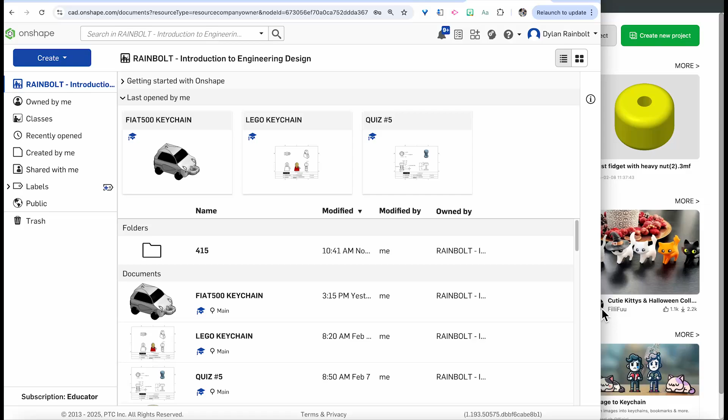I'm going to be showing you how to queue up 3D prints in Bambu Slicer software, and then how to actually 3D print it out.

What you want to do first in OnShape is go to the actual part that you want to end up 3D printing out. As you can see here, I've got my Fiat 500, and I've got these 4 tires as well. If you want to print out all of these parts together, click on this, hold down Shift, and then click on your last part.

Basically, what we want to do is create a composite part, as it's called. That's what I've got here. So how do we create the composite part?

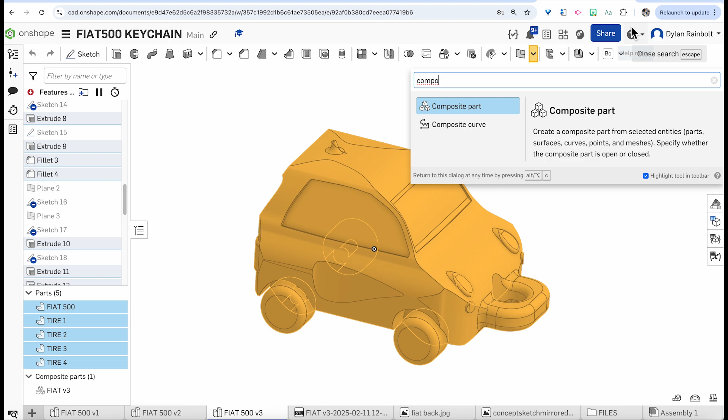After selecting all of these parts, go into Search Tools and type in composite part. As you can see, it's this guy right here. If I click on that, it's going to combine all of these parts together, so that's this part right here. You press the green check mark, and then you could go through and name this part.

So I would name this Fiat, and then I'm going to go version 4. So now, you only have one composite part showing up here.

You would right click this, and then click export. Now, if it's the case where you only have one part, you simply click on that part and then click export. So we're going to click export here.

There are a couple of settings that we want to use. Your file name will be different. I established export rules for this, so that's the part name and also a timestamp. If you don't have that, totally fine, you can change the name of your file. Remember, it's always important to give your files good names.

What we then want to do is click this drop down and scroll down. It's going to automatically select Parasolid at first. You want to scroll down to STL and select that.

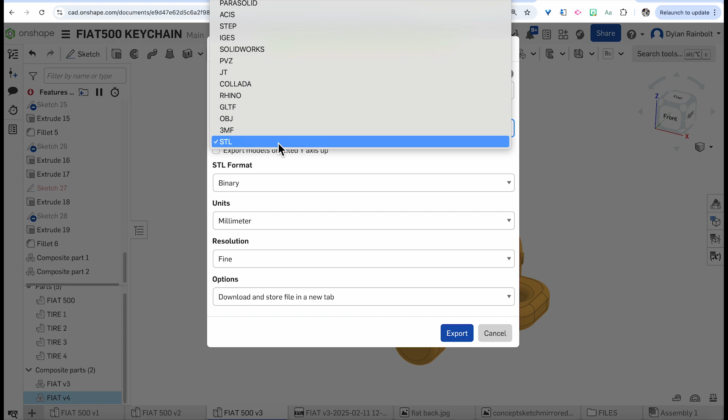Next, we want the units to be in millimeter. If you put in centimeter, your part will come in very, very small. If you put in inches, your part will come in a whole lot bigger than it needs to be. So I'm going to select millimeter.

Then for resolution, I always like to go fine on this. For options here, you can just put download. Then we're going to click export. Now this is going to download into my folder here.

Next, we want to make sure that we have installed the Bambu Handy app on our phone. This basically allows us to sign in to the Bambu X1 Carbon, P1P, P1S, A1, A1 Mini, or any of those Bambu printers that you've got.

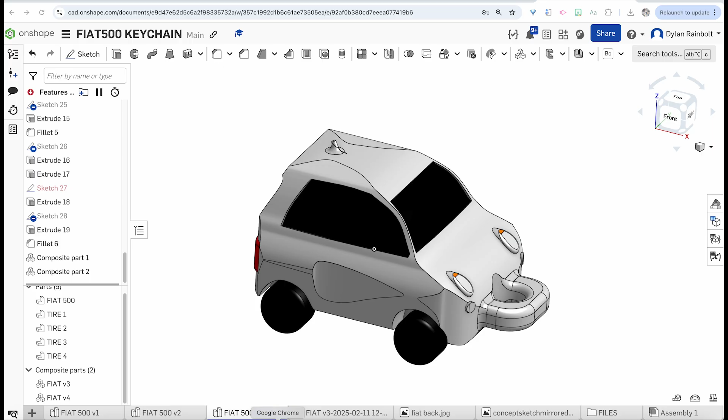All right, so we've downloaded this file. What we're going to do next is get the Bambu Studio app going. If you do not have the Bambu Studio app, you can go in here, click software, and then click Bambu Studio.

That's going to allow you to download this for either Mac or Windows. I have Mac, so I would click there, but if you have Windows, that would be it. Now, if you're on our school desktop computers, this is already installed.

You can simply press the Windows key on your keyboard, it looks like this, then type in Bambu Studio, and that will bring it up.

So this is what the Bambu Studio app looks like. Up here in the top left, you can see there's a login or register option. If you do not have an account, click create account here. You could use your school email to create your account. What I'm going to do is go ahead and log in here.

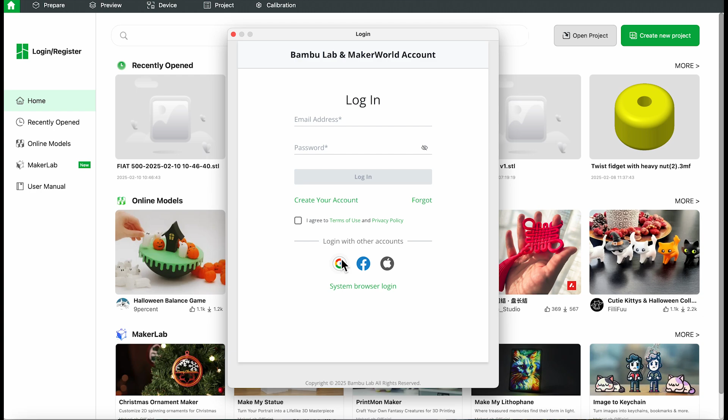So login successful, then it's going to prompt you to open Bambu Studio again. I always like to click synchronization, yes. And as you can see now, I'm logged in onto here, all right?

Now, the one thing you need to make sure you do is click device, and you should end up seeing your printer on here. If you're not connected to the printer, you'd have to go to the printer and then go to the QR code. I will put the little symbol in the corner of the screen showing what symbol you click on to get the QR code to sign into your device. But basically your device should show up in here.

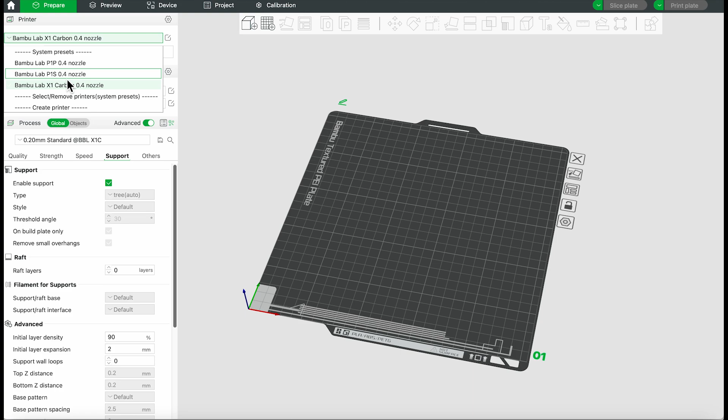What we can then do is actually prepare our print. If I go to this print bed, we've got X1 Carbons here at the school. However, you can end up getting other system presets - I have a P1P as well as a P1S at my house. So now we've got the X1 Carbon selected.

We've also got a plate type, which is the textured PEI plate. It'll say that in the corner of your plate. Some of you might have the cool plate - if that's the case, then you select that. But for all the printers at the school, we've got the textured PEI plate.

What I then want to do is click this add command, so I can click add here. Then I want to go to my downloads and find that file, so I can click open and put that in here.

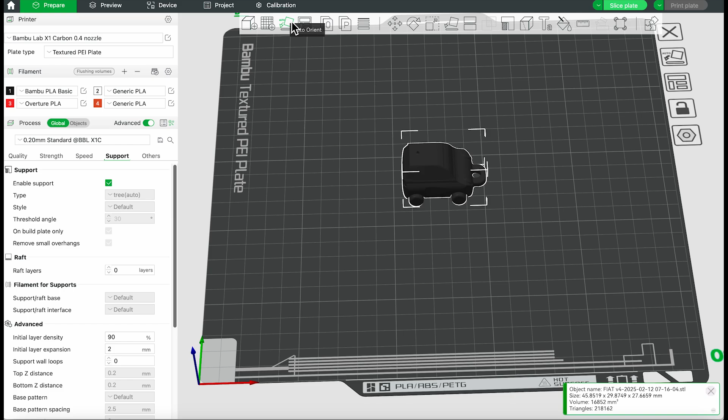Now, some things we want to end up doing - we do want to usually auto-orient, and auto-orient is going to end up finding the best orientation to print out on. As you can see for my car, if I end up printing in this orientation, it's actually going to leave a textured part on this side. In that case, I actually disagree with how Bambu Labs has oriented this. I'm going to keep it in this orientation because I find it important to make sure these sides look good.

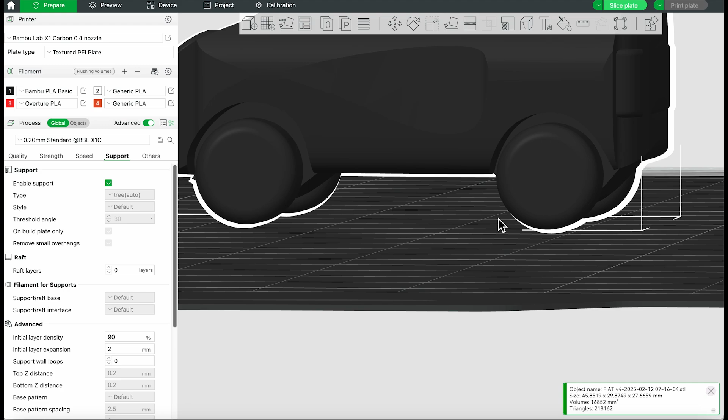What I'm then going to do is ensure that there is support. So for any layers like the ones down here at the bottom, if I don't generate support, it's basically going to try to deposit material into thin air. So it's always important to have the support.

If I end up clicking slice plate, then you can see it actually did not render for that. Yeah, so it did not render for this, but basically it's going to end up putting material down here for the supports. Let's see if I can find it in here. Okay, so it doesn't show up on there, but basically we do want the supports to generate.

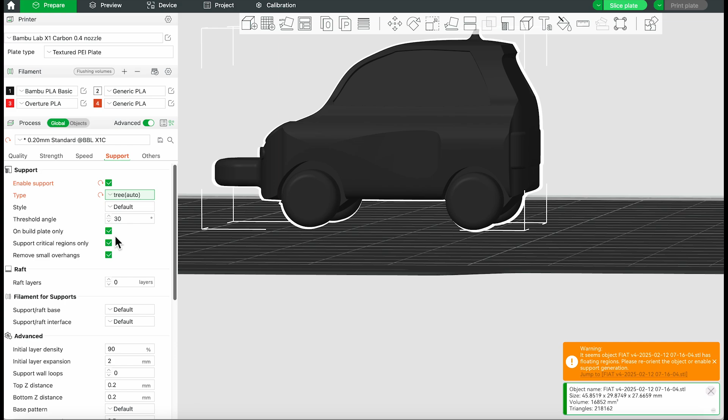I always like to use the tree supports - that's what I like to use. So I do tree, and then what I like to do is build plate only, might be because of these two. Let's slice the plate. Okay, now you can see these tree supports came in. So basically it's going to create material and deposit it here so that the first layer on this bottom part has something to actually deposit onto, so it's a nice clean straight line at the bottom there.

So now this is it - these are the tree supports. Other options are you could go to normal, auto. I always like to use tree supports though.

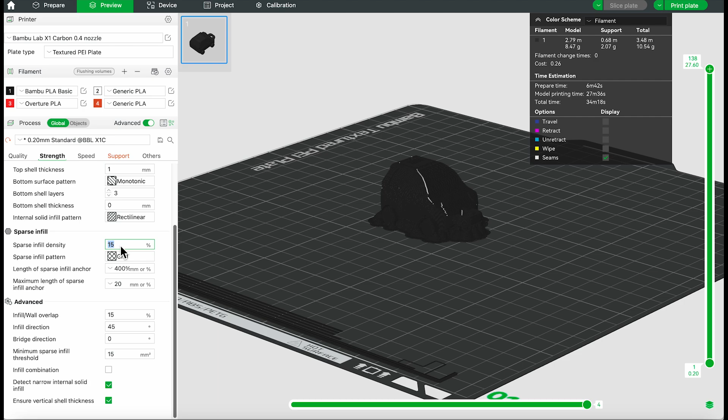And then basically what we want to end up doing is look at the different settings here. So there's quality, there's also strength. And strength here, usually we use a sparse infill density of 15. If you end up making that higher, you're going to end up using more material, which is going to cost you more money. However, it is going to be a stronger print.

So maybe for a keychain, that's something you might want to end up going up to 20, 25, or 30 to make it a whole lot stronger. But anyways, you can end up messing with these settings if you'd like to.

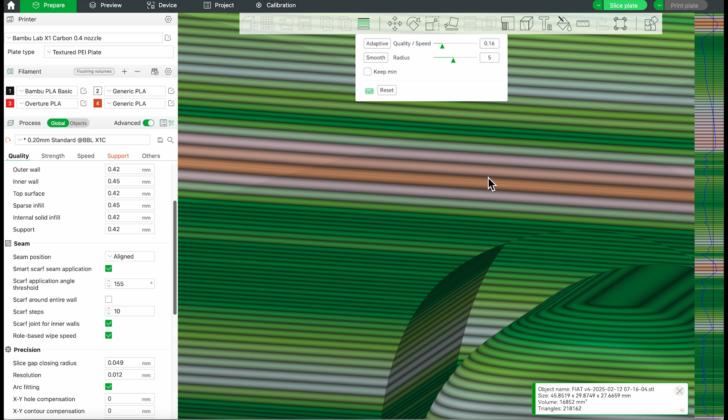Another thing we can do is establish variable layer height. Basically this changes the layer height as well, so in areas where we want higher quality, it'll establish smaller layer lines, and the quality will be a whole lot better there rather than elsewhere. The Bambu Lab software determines that a layer needs a closer or smaller layer offset, and increases the quality in those parts.

You can also smooth this out, which makes it less evident that there's a change in the actual height of those layers. I usually like to do that too, it makes our prints come out pretty nice.

The last thing is using the AMS, so there's color printing as well. If I go in here, I can select a device, the Heat printer, which has the AMS, and you can see all these different colors established on there. Those are the colors we currently have loaded in.

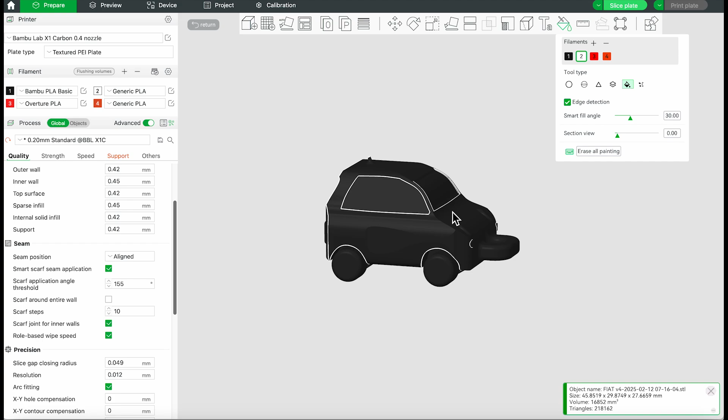If I wanted to, I could switch the colors here, going with white and black. Now I can click Fill, and then go in and change the color of these windows so they appear black. I can also change the color of these brake lights so they appear red, and change the color of these guys so they appear orange if I'd like to, and I think I'm going to do that.

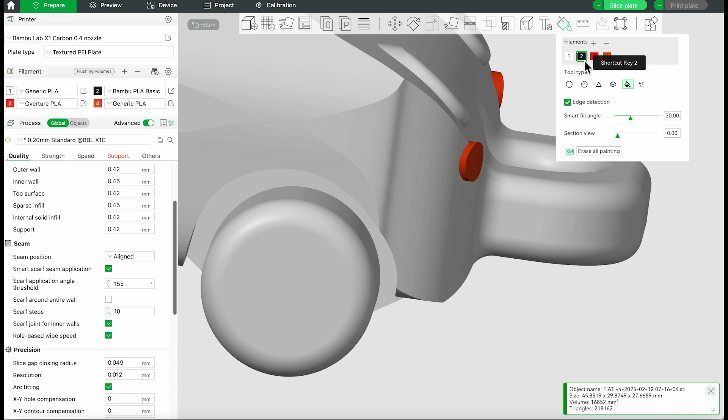Then I can make sure I select all these different parts. The other thing is we probably want our tires to be black as well, so I can go in and set the tires as black.

Now one thing I want to show you is this: on my front windshield, I actually made a mistake with the file, so I have to edit this. If I try clicking on this, you'll see my entire car turns black. In this case, this was filleted, and if it's filleted, it's just rounded out, so basically it's seeing this as one whole surface here. That's a change I want to make to the windshield itself, but anyways, that's pretty solid.

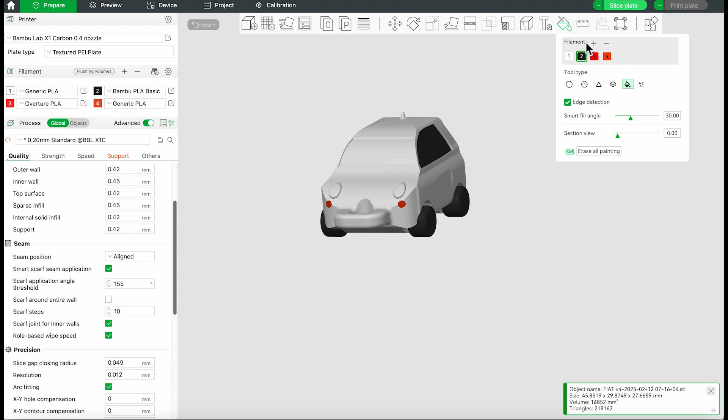What we can then do is slice the plate, and then click print plate. You'll see that this is going to take 7 hours 41 minutes for mine. Why is that? It's because there's all these different colors being used.

So if we go back here, I can go back to my painting and erase all the painting. If I slice this plate, you'll see it takes a whole lot less time when there's just one single color being printed out, so it's only an hour and 4 minutes.

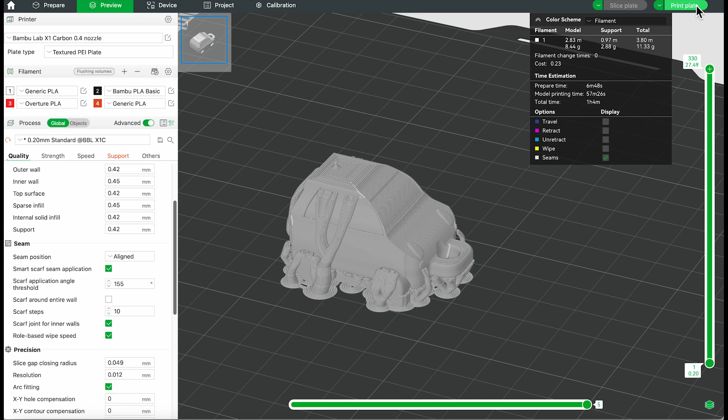What we'll do then is go ahead and follow through with printing this out so it's just the single color. I can click print plate, select the printer we want to use, the Heat printer. If this isn't showing up, you can refresh after hitting that QR code. Then we'll go ahead and select send, which sends it over to the 3D printer and allows it to print out.